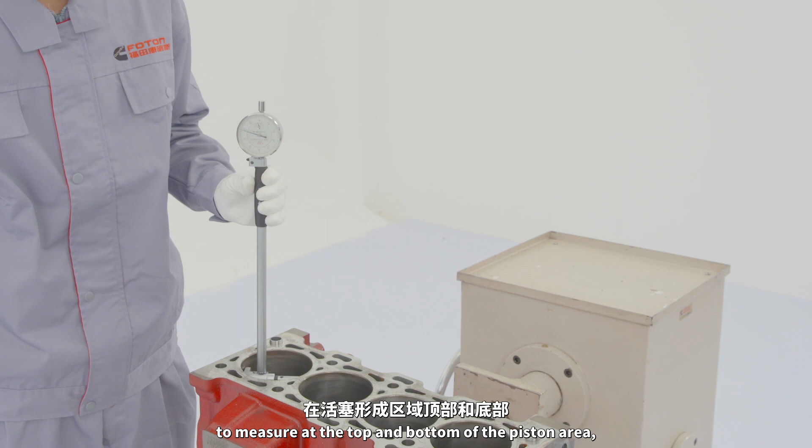Use internal dial indicator to measure the cylinder bore separately at the top and bottom of the piston area, totally 4 positions at 90 degrees. Cylinder bore diameter should be within 93.99 to 94.01 mm. The out of roundness should not exceed 0.01 mm. The taper should not exceed 0.01 mm. Remove the main bearing covers and put them aside orderly according to their marks.

Installation of piston cooling nozzle. Tools for installation of piston cooling nozzle: torque wrench. Clean and check piston cooling nozzle. Ensure that nozzle is not clogged, deformed or oil stained. Install nozzle. Ensure nozzle dowel pin is seated correctly and tighten bolts to 10 newton meters according to technical specification. Then, check if any oil cooling nozzle is forgotten to be installed.

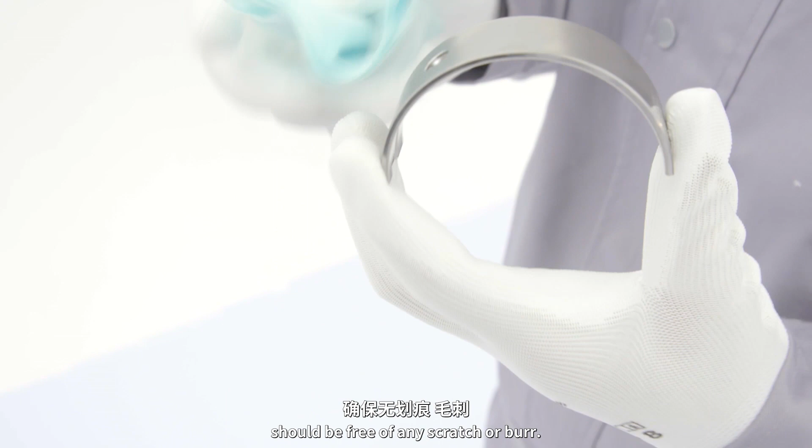Installation of crankshaft. Tools for installation of crankshaft: oil drip. Wipe the upper shell housing of spindle with non-woven fabrics. The shell surface and back should be free of any scratch or burr. The original positioning of the shell should be marked during removal to facilitate reinstallation. Both ends of the shell shaft and the shell base should be flush respectively.

The locating boss of upper shell should sit in the positioning groove of the shell base. The oil hole of upper shell should be aligned with that on shell housing. The shell surface should be coated with clean engine oil. Note that the fourth shaft seat and shell back shall not be oiled.

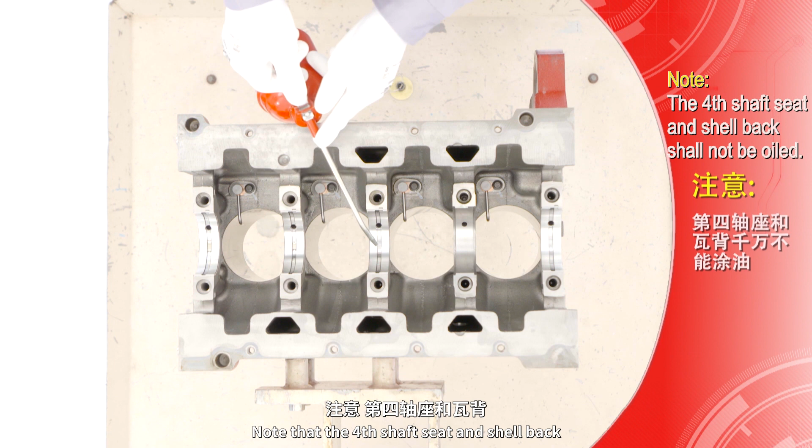Wipe the crankshaft mounting surface with non-woven fabrics. Check the crankshaft appearance for impact or scratch or for blister or rust. Clean all oil passages of crankshaft and dry them with compressed air. Crankshaft hoisting. Mount the crankshaft onto the cylinder block with its small head at the front of cylinder block. Handle gently to avoid impact. Each shaft journal of crankshaft should be coated with clean engine oil for lubrication.

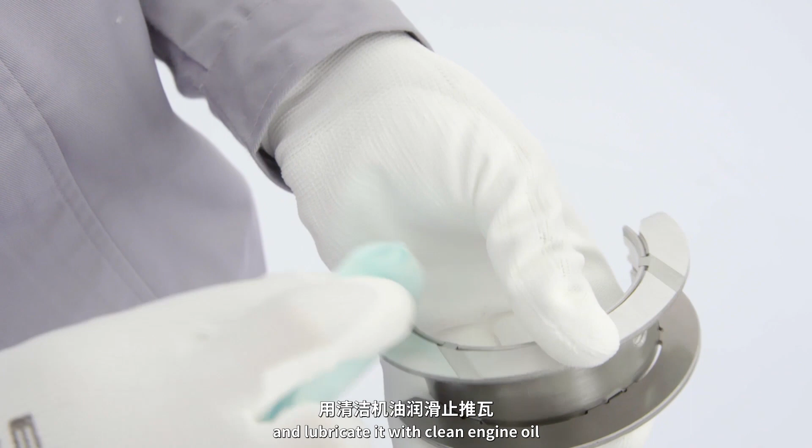Wipe the thrust bearing shell with non-woven fabrics and lubricate it with clean engine oil before installing it to the fourth bearing shell base. Rotate the crankshaft slightly until the clearance at one end of bearing shell cover is similar to that at the other end. Put in the thrust bearing shell.

With one hand facing the operator, rotate the crankshaft while, along the crankshaft rotating direction, push the shell into its base. Note that the upper locating boss of thrust bearing shell should sit in the positioning groove of the shell base. Check if both ends of all shells are flush respectively.

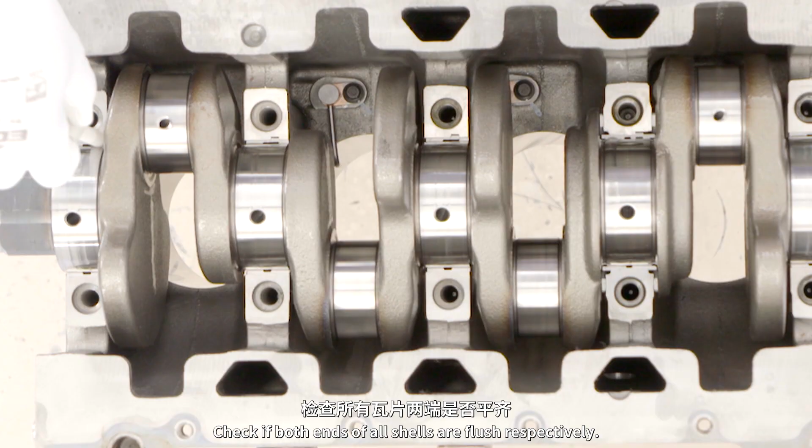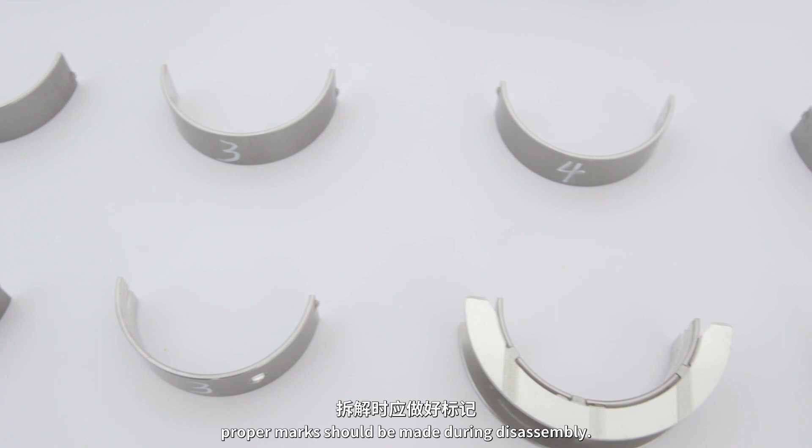Installation of main bearing. Tools for installation of main bearing: oil drip, torque wrench, dial indicator with magnetic base, bracket, shockproof rubber hammer, dial indicator. Wipe the lower shell and cover of main bearing with non-woven fabrics. Carefully check if there is any impact, scratch or impurity. If the used bearing shell is to be reinstalled, proper marks should be made during disassembly.

Installation of lower shell of main bearing. Ensure that the lower shell is seated correctly in the positioning groove and the bearing shell is flush with the shell base on both ends. The shell surface should be lubricated with clean engine oil before mounting onto main bearing cover. Ensure that the annular dowel pin on the main bearing cover is positioned correctly.

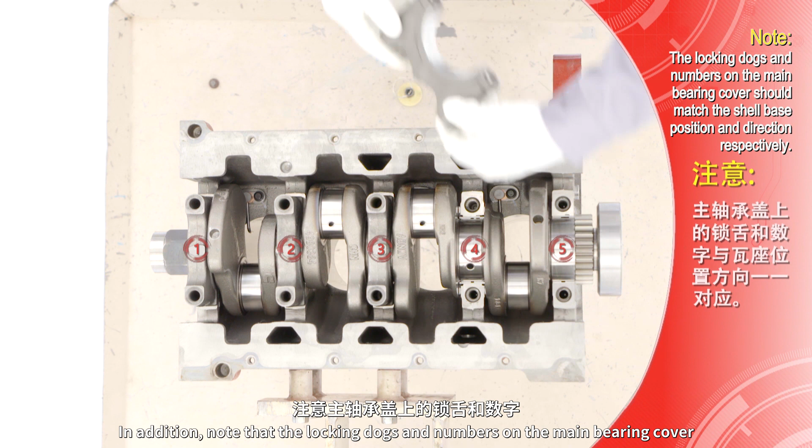In addition, note that the locking dogs and numbers on the main bearing cover should match the shell base position and direction respectively. Use a rubber hammer to gently tap the bearing cover until it fits closely with the bearing seat. Lubricate the main bearing cover bolts with clean engine oil, install them into the threaded sections, and tighten them crosswise from the center to both sides.

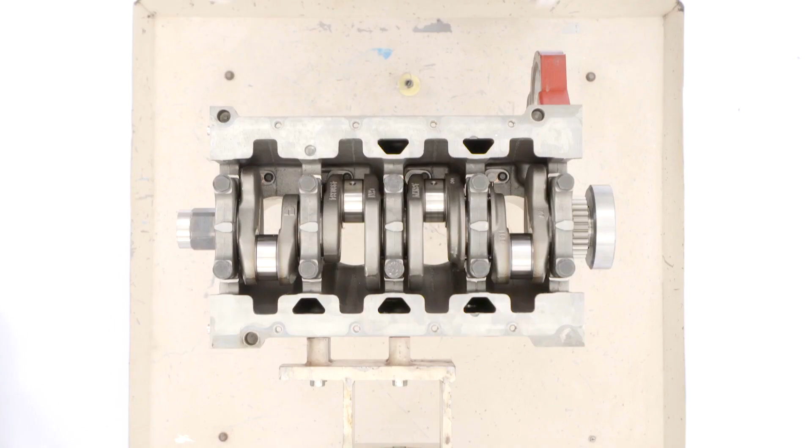Technical specifications. First, tighten the bolts to 50 newton meters, next torque to 80 newton meters, and finally rotate them by 90 degrees. Note that while tightening the main bearing bolts to final torque, check frequently if the crankshaft rotates freely.

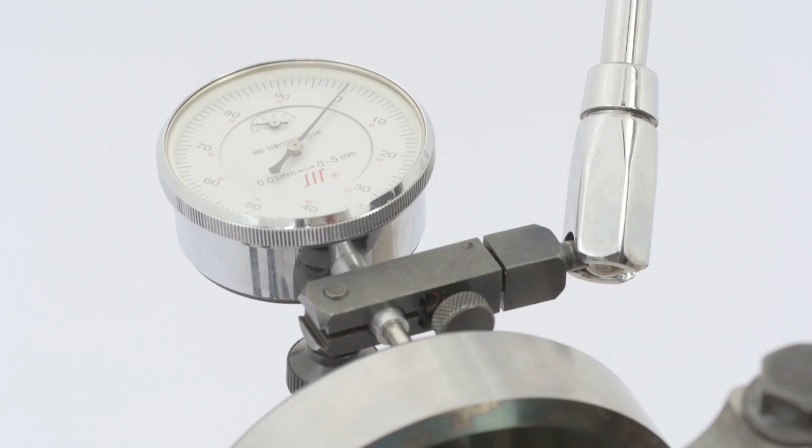Fix the magnetic base onto the flat surface of cylinder block, then press the dial indicator against the front end of the crankshaft and fix it at the smooth surface. Finally, move the crankshaft longitudinally and smoothly. The maximum difference among dial indicator readings is the axial clearance. The axial clearance should be within 0.023 to 0.365 mm.

Installation of front gear chamber. Tools used for installation of front gear chamber: torque wrench. Clean and check front end face of the cylinder block. Mount the new gasket onto front gear chamber.

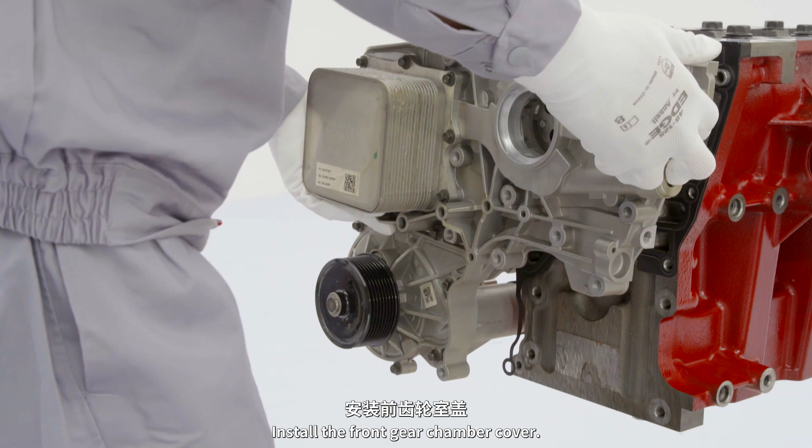Check the components of front gear chamber for scratches, cracks, and abrasion. Install the front gear chamber cover. Install bolts and tighten them as shown to 24 newton meters according to technical specification.

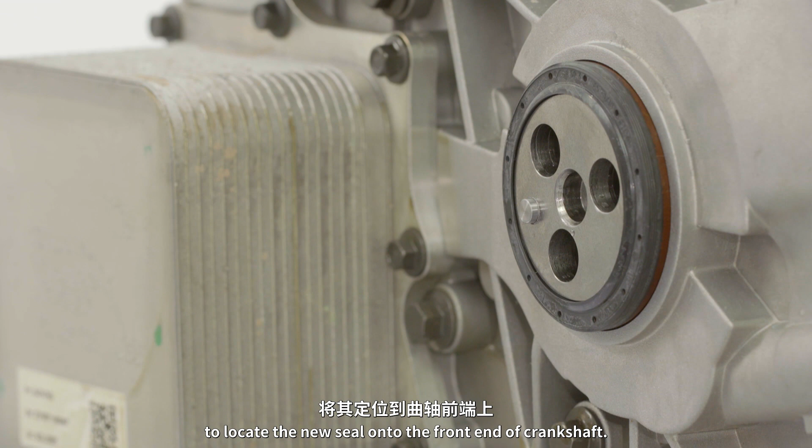Installation of crankshaft front seal. Tools for installation of crankshaft front seal: special tools for crankshaft front seal, rubber hammer. Clean and check oil seal hole. Use the duct of new oil seal to locate the new seal onto the front end of crankshaft.

Then use special tools to press the oil seal into the front chamber cover at a constant speed until the correct depth is reached. Note: it is prohibited to apply oil to the oil seal.

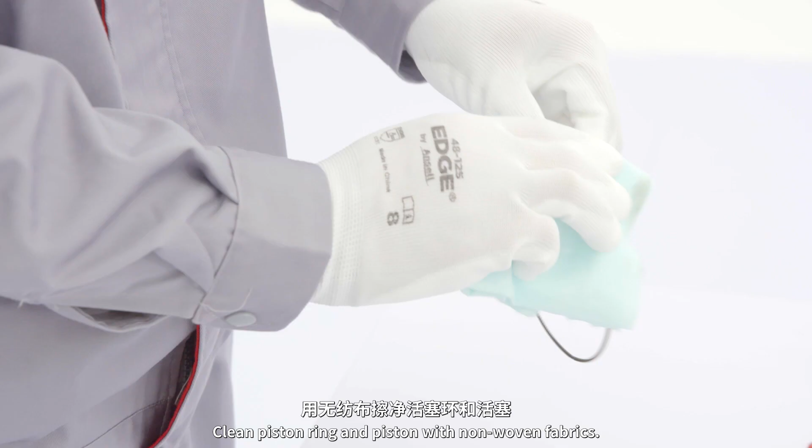Subassembly of piston and connecting rod. Tools for subassembly of piston and connecting rod: oil drip, piston expander. Clean piston ring and piston with non-woven fabrics. Check if they are clean without any burr.

Firstly, install two-piece oil control ring with expansion ring opening at 180 degrees from the oil control ring opening. Secondly, install the black gas ring. Finally, install silver-white gas ring. Note that while installing the top two gas rings, the top mark should face the piston top.

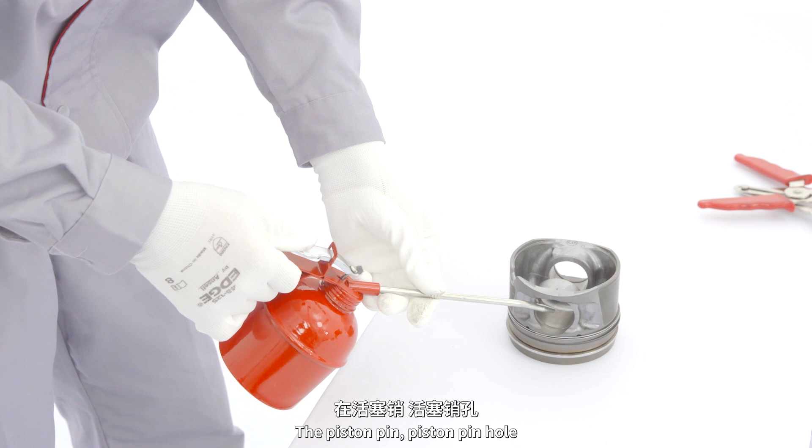The piston pin hole and connecting rod pin hole should be coated with a layer of clean oil. If the used piston pin as well as connecting rod and its bearing shell are to be reinstalled, proper marks should be made during disassembly. The removed parts must be restored.

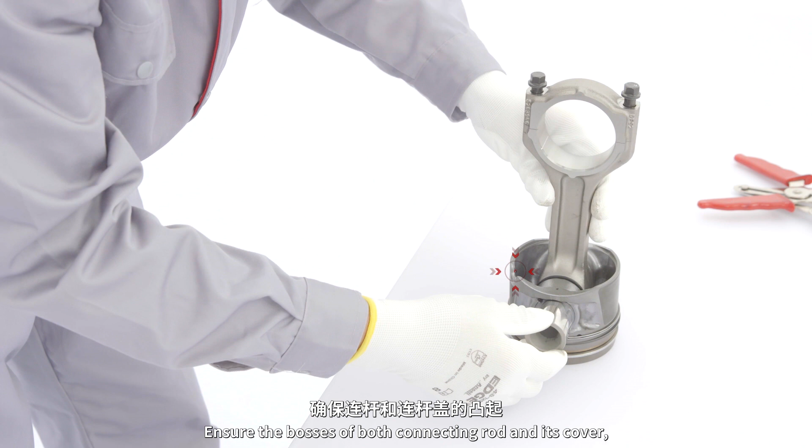Assembly of piston and connecting rod. Note: ensure the bosses of both connecting rod and its cover are at the same side as the notch of piston skirt. Install the new piston pin circlip. Check if the piston pin rotates smoothly.

Wipe the upper and lower shells of connecting rod with non-woven fabrics. The deep red shell should be at the top of connecting rod. The silver shell should be at the bottom of connecting rod. Check if there is any impact, scratch or burr.

Install the connecting rod bearing shell. Ensure the shell sits correctly in the positioning groove, and the bearing shell is flush with the shell base at both ends. Lubricate the connecting rod bearing shell surface with clean oil. Note that the shell back should not be oiled.

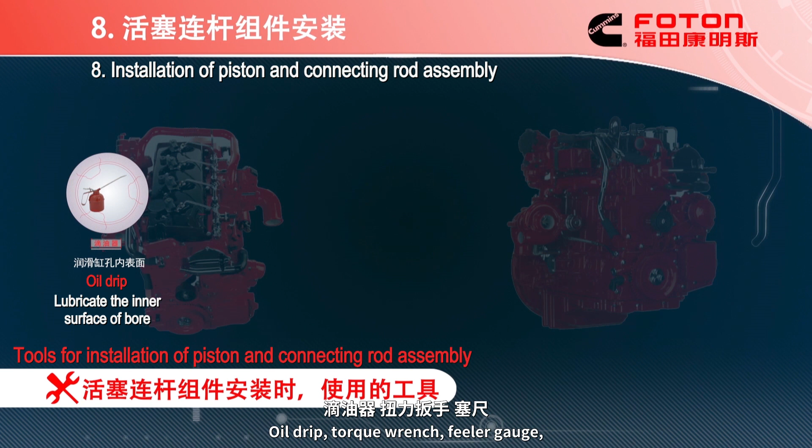Installation of piston and connecting rod assembly. Tools for installation of piston and connecting rod assembly: oil drip, torque wrench, feeler gauge, dial indicator, shockproof rubber hammer, piston ring compressor.

Lubricate the inner surface of bore with clean oil. Mount the guide tooling. The arrow mark on the top of piston should face the front of engine. Note: don't impact the piston cooling nozzle.

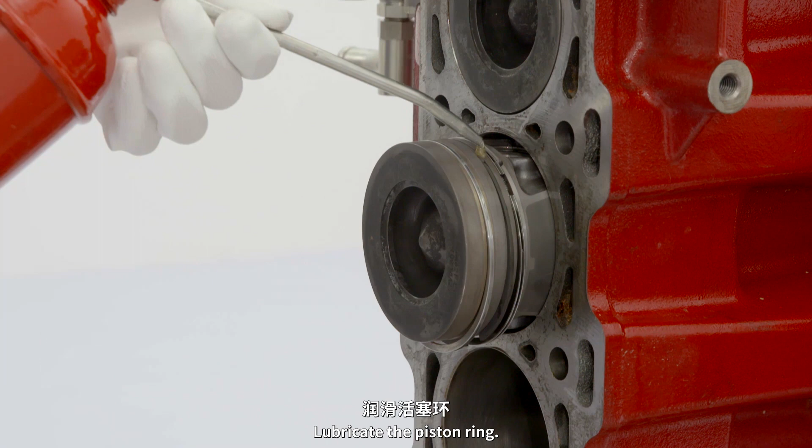Lubricate the piston ring. Adjust the piston ring opening direction so that the openings of adjacent piston rings are placed by 120 degrees and not at the piston pin axis. Compress piston ring with piston ring compressor. Install piston and connecting rod assembly.

If the piston cannot move freely during installation, remove the piston. Check if it is broken or damaged, and lubricate the connecting rod shell surface and bolts with clean oil. After that, install the connecting rod cover to the original connecting rod according to the mark.

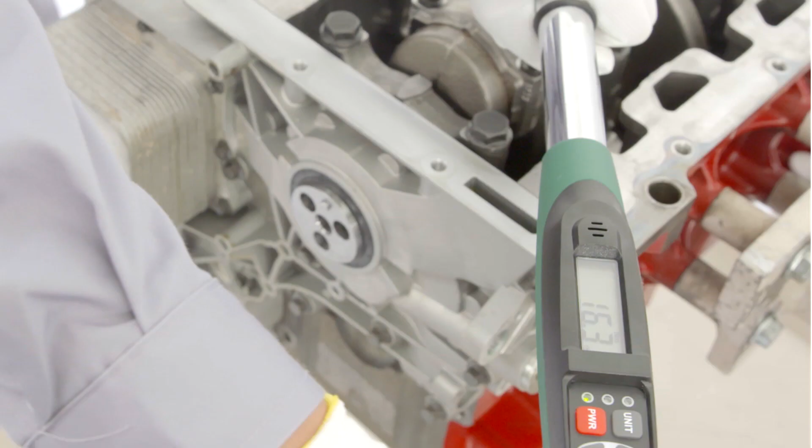Tighten bolts. Technical specifications: firstly, tighten the bolts to 34 newton meters. Secondly, rotate the bolts by 60 degrees. Check if all the bosses of connecting rod cover face the front of the engine, if the crankshaft rotates freely, and if the connecting rod clearance is within 0.10 mm to 0.35 mm.

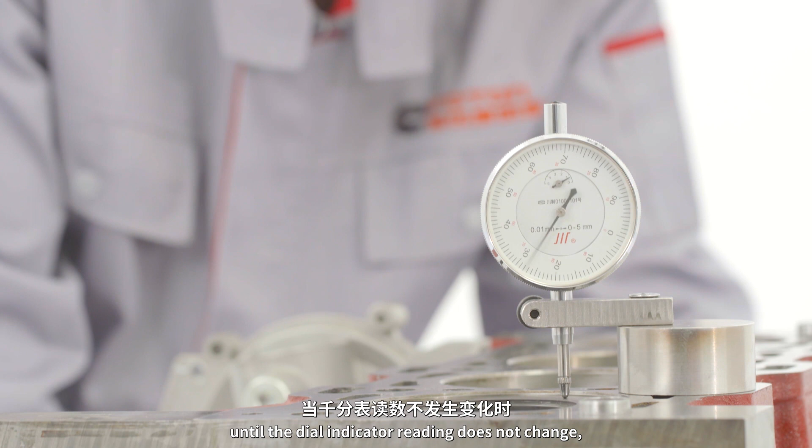Rotate the crankshaft until the dial indicator reading does not change, which means the TDC of piston is reached. On smooth flat surface of cylinder block, set the dial indicator to 0 and measure the piston protrusion. It should be within 0.034 to 0.260 millimeters.

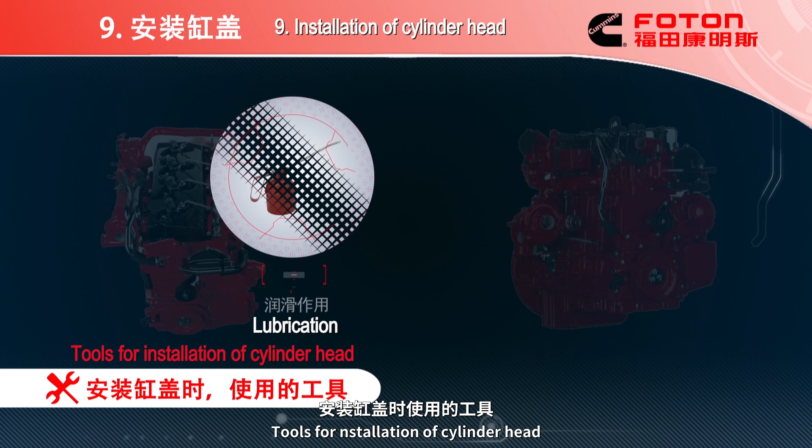Installation of cylinder head. Tools for installation of cylinder head: oil drip, torque wrench. New cylinder head gasket must be used. Check cylinder head gasket and ensure it is intact and clean. Install cylinder head gasket to the top of engine cylinder block. The dowel pin hole on the gasket should be aligned with annular dowel pin.

Installation of cylinder head. Lubricate bolts with clean oil and install them. Pre-tighten the bolts manually and tighten them as shown. Technical specifications: firstly, tighten the bolts to 60 newton meters. Secondly, clockwise rotate the bolts by 90 degrees. Thirdly, continue rotating clockwise by 90 degrees.

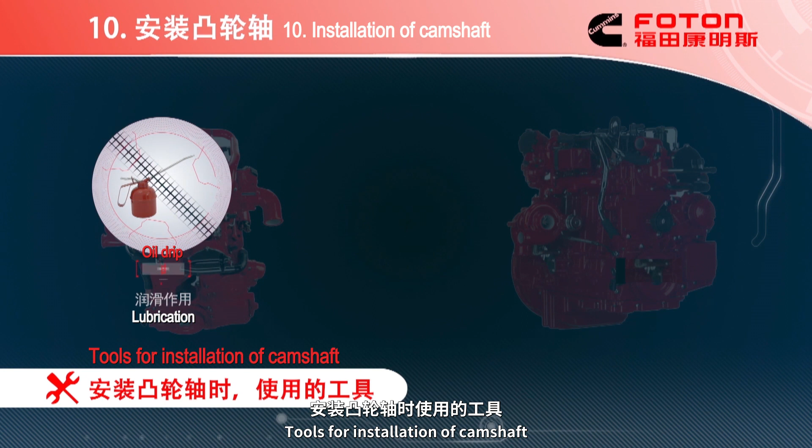Installation of camshaft. Tools for installation of camshaft: oil drip, torque wrench, dial indicator with magnetic base, bracket, dial indicator. Clean camshaft surface and check if it is oily or scratched. Install camshaft. Note that the camshaft should not be impacted. Do not mount the camshaft into its hole forcibly. Otherwise, the camshaft will be damaged.

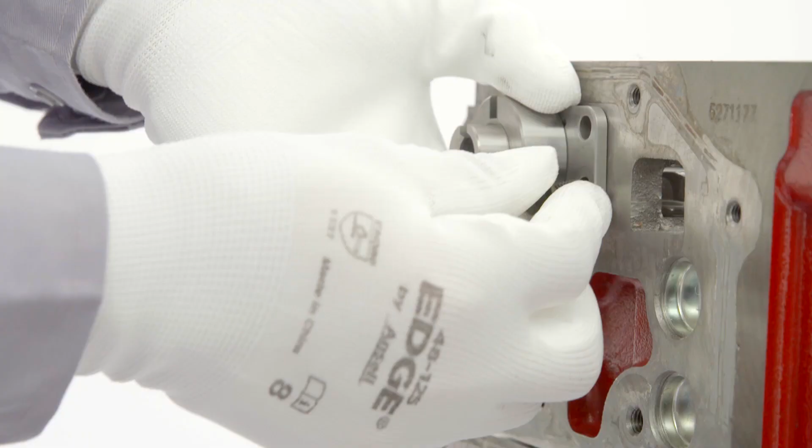Thoroughly lubricate camshaft journal and cam with clean oil. Check and mount camshaft thrust plate. Tighten bolts to 10 newton meters according to technical specification. Measure the axial clearance of camshaft. It should be within 0.10 to 0.40 millimeters.

Installation of driving chain idler. Tools used for installation of driving chain idler: oil drip, torque wrench. Install the groove thrust washer onto annular dowel pin. Align the groove with the dowel pin hole in the cylinder block. Check and install the idler.

Lubricate the idler shaft with clean oil and rotate it until the dowel pin is locked into the cylinder block pin hole. Install the bolts and thrust washer. Tighten bolts to 130 newton meters according to the technical specification. Note the mounting direction of driven sprocket and ensure that the small chamfer side faces outwards. Tighten the bolts to 10 newton meters according to the technical specification.

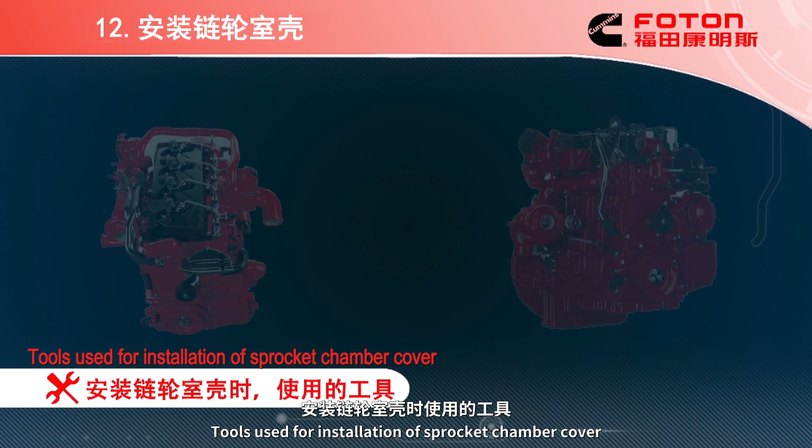Installation of sprocket chamber cover. Tools used for installation of sprocket chamber cover: sealant. Check if there is any part cracked or worn severely. Install a new sealing ring into the sealing groove. Ensure proper installation. Apply sealant to the sealing ring as shown. Install the sprocket chamber cover and pre-tighten it manually. Don't tighten the sprocket chamber bolts.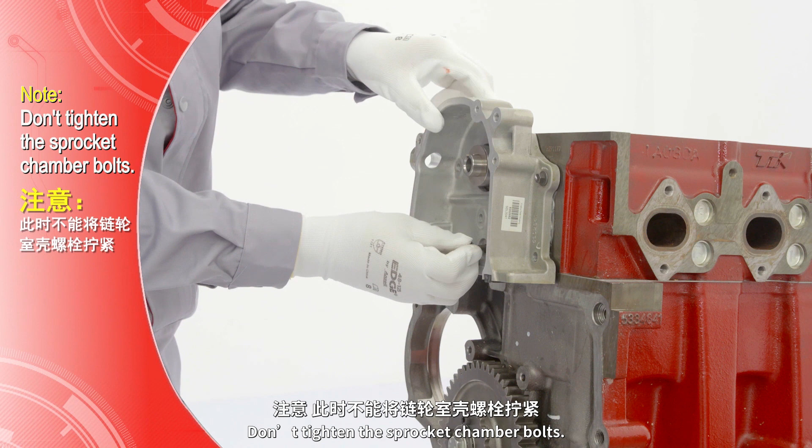Installation of driving chain. Tools used for the installation of driving chain: torque wrench. Install a new friction gasket onto the front end of camshaft. Install the overhead camshaft sprocket together with a driving chain onto the front end of camshaft and driven gear. Install the chain fixing guide and tensioner chain guide. Tighten the screws to 20 newton meters according to the technical specification. At this time, do not tighten the sprocket chamber housing and bolts shown in the figure.

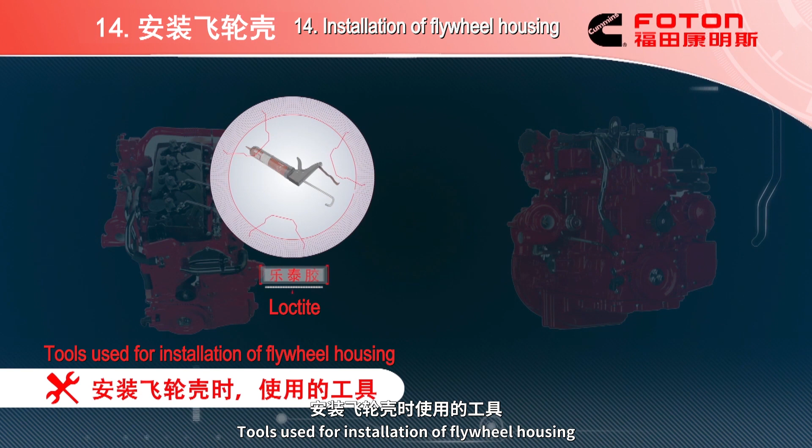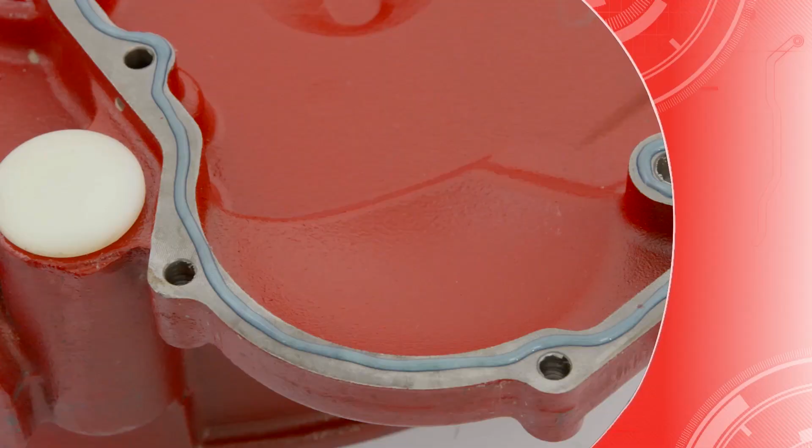Installation of flywheel housing. Tools used for installation of flywheel housing: Loctite, torque wrench. Clean the mounting surface of flywheel housing. Check the flywheel housing and ensure it is free of any crack. According to the tracks as shown, apply Loctite 509 evenly on the mounting surface with glue width at 1 to 2 millimeters. The glue line must be continuous without any breakpoint. Note: if the assembly is not finished in 5 minutes or if the tightening is not completed in 15 minutes after gluing, remove the Loctite and repeat the gluing again.

The well-glued flywheel housing should be mounted onto the rear end face of cylinder block along the guide pin. Pre-tighten bolts manually. Note, during installation, the flywheel housing should not rub against or shake on the cylinder end face so as to protect the coated surface. Tighten bolts in sequence. Technical specifications: 85 newton meters for number 1 to number 7 bolts, and 24 newton meters for number 8 to number 10 bolts.

After the flywheel housing is installed, refer to the torque and sequence shown in the figure to tighten the sprocket housing bolts in several steps. Step 1: 3 newton meters for number 1 and number 2 bolts. Step 2: 6 newton meters for number 3 and number 4 bolts. Step 3: 3 newton meters for number 5, number 6, number 7 and number 8 bolts. Step 4: 10 newton meters for number 1 and number 2 bolts. Step 5: 12 newton meters for number 3 and number 4 bolts. Step 6: 10 newton meters for number 5, number 6, number 7 and number 8 bolts. Step 7: 20 newton meters for number 9 bolt.

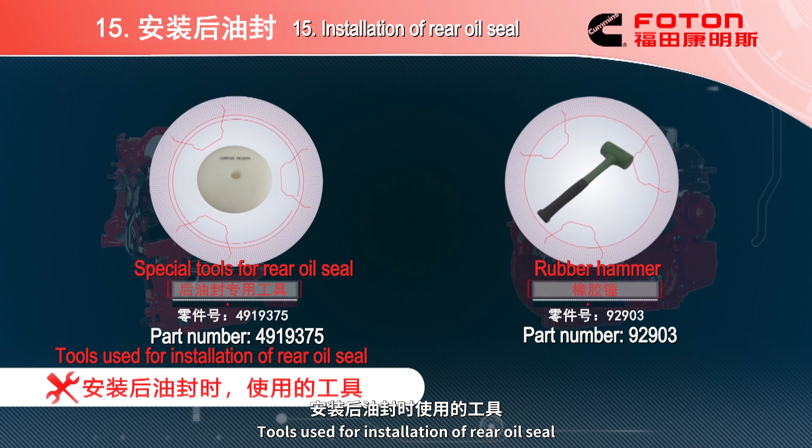Installation of rear oil seal. Tools used for installation of rear oil seal: special tools for rear oil seal, rubber hammer. Clean and check oil seal and its mounting hole. Use the guide of the new oil seal and locate the new seal onto the rear end of crankshaft. Then use special tools and press the seal to the correct depth at a constant speed. Note: don't oil the new oil seal.

Installation of flywheel. Tools used for installation of flywheel: torque wrench, crank.

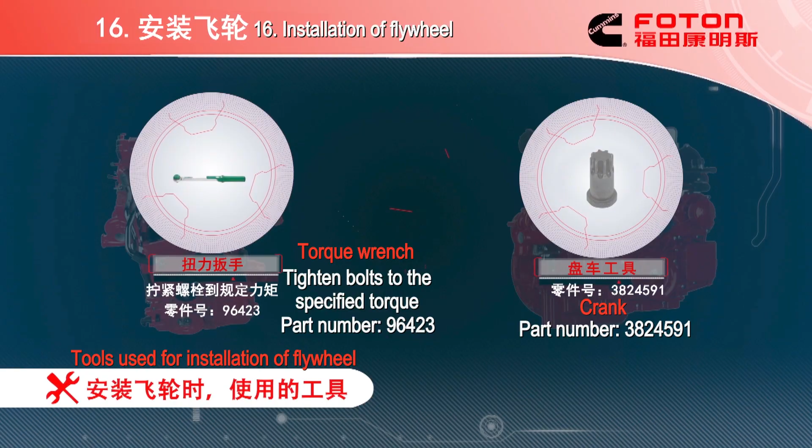Clean and check the flywheel and ensure it is free of any crack. Installation of flywheel: manually pre-tighten the oiled bolts. Fix the flywheel with the crank to prevent it from rotating. Tighten bolts in the heart-shaped way. Technical specifications: firstly, tighten the bolts to 30 newton meters. Secondly, rotate the bolts by 90 degrees.

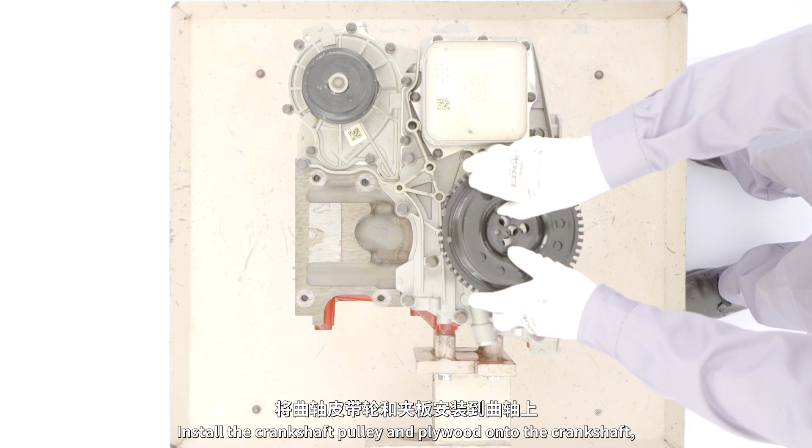Installation of crankshaft pulley. Tools used for the installation of crankshaft pulley: torque wrench, crank. Check the crankshaft pulley for tooth lost, crack or other defects. Install the crankshaft pulley and plywood onto the crankshaft. Ensure to align the dowel pin correctly. Lubricate the bolts with clean oil and pre-tighten them manually.

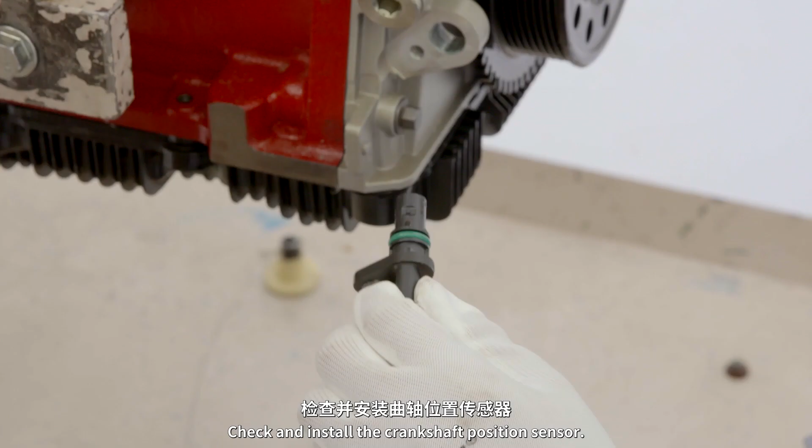Tighten the bolts. Technical specifications: firstly, tighten the bolts to 75 newton meters. Secondly, rotate the bolts by 45 degrees. Note: the crankshaft must be fixed with the crank. Check and install the crankshaft position sensor. Technical specification: 8 newton meters.

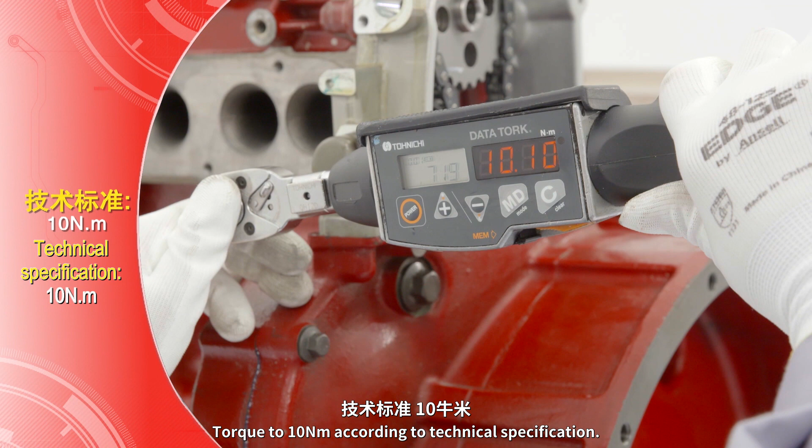Installation of chain tensioner. Tools used for installation of chain tensioner: torque wrench. Check if there is any part cracked or worn excessively. Install chain tensioner. Tighten bolts step by step in pairs. Torque to 10 newton meters according to technical specification.

Confirmation of engine timing. Tools used for determining engine timing: torque wrench, crank, timing pin, camshaft timing plate. Use the engine crank to rotate the crankshaft clockwise. Push the timing pin into the crankshaft pulley and the designated hole in the front chamber cover. Lock up the crankshaft. Mount the timing cover to the front end of camshaft. Tighten the timing cover bolts manually. Meanwhile, keep the rear notch of camshaft vertically upward.

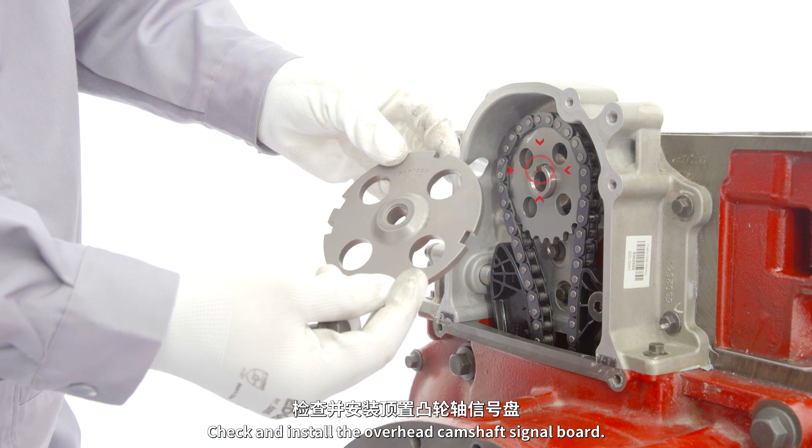Confirm the engine timing. Check and install the overhead camshaft signal board. Install the bolts. Technical specifications: firstly, tighten bolts to 120 newton meters. Secondly, release bolts by 180 degrees. Thirdly, tighten to 30 newton meters. Fourthly, rotate by 45 degrees.

Installation of sprocket chamber cover. Tools for installation of sprocket chamber cover: Loctite, torque wrench. Both sides of sprocket chamber housing protruding from the rubber pad should be glued. Check and install sprocket chamber cover. Pre-tighten it manually. Tighten the bolts as shown to 7 newton meters according to technical specification. Check and install camshaft position sensor. Torque to 8 newton meters according to technical specification.

Installation of rocker. Tools for installation of rocker: oil drip, torque wrench. Check jumper clamp and rocker for any crack or excessive wear. Restore the removed parts according to the marks made during disassembly. Any cracked or worn part should be immediately replaced. If the jumper clamp is replaced with a new one, note that the large head should face the exhaust side.

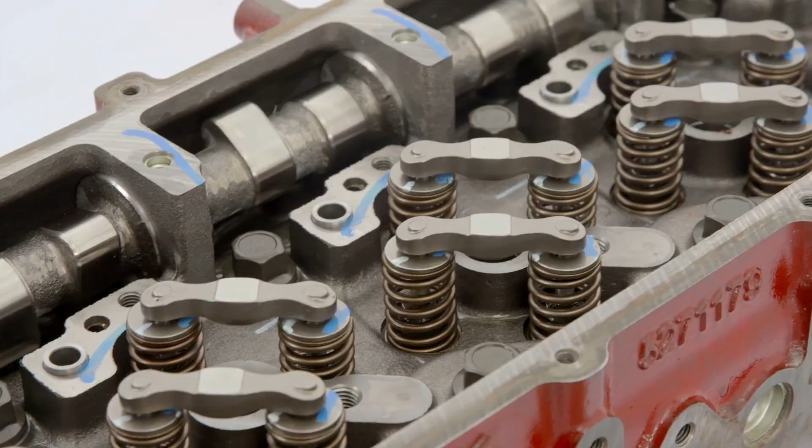Use clean oil to lubricate the rocker and the contact surface between camshaft and jumper clamp. Restore the rocker assembly. Pre-tighten it manually. Tighten bearing seat bolts to 36 newton meters according to technical specification.

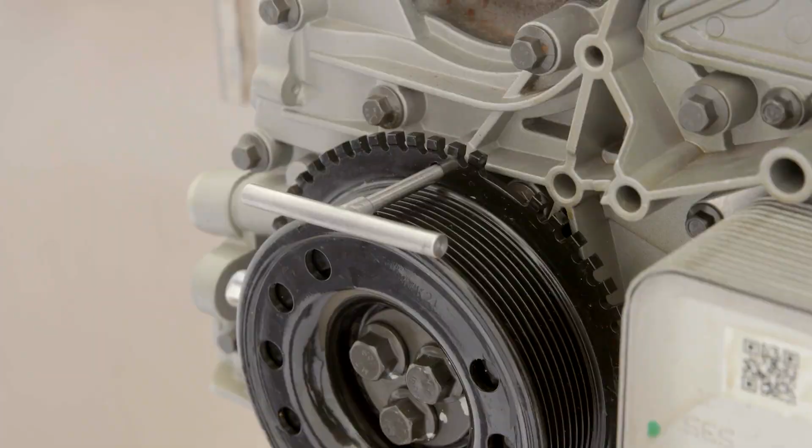Adjustment of valve clearance. Tools for adjustment of valve clearance: feeler gauge 0.02 to 1.00 millimeters, torque wrench, timing pin, hexagon socket wrench, crank. After confirming the engine timing, rotate crankshaft with a crank. Insert the timing pin. When the crankshaft pulley hole aligns with front gear chamber cover hole and both rockers of number 1 cylinder are loosened, it indicates the TDC of number 1 cylinder compression is reached.

Note: only when the engine coolant temperature stays at 60 degrees Celsius or below can the valve clearance be adjusted. Intake valve clearance 0.25 plus or minus 0.05 millimeters. Exhaust valve clearance 0.51 plus or minus 0.05 millimeters. At the TDC of number 1 cylinder compression, check or adjust the intake valve clearance of number 1 cylinder, exhaust valve clearance of number 1 cylinder, intake valve clearance of number 2 cylinder, exhaust valve clearance of number 3 cylinder.

Turn the crankshaft by 360 degrees with a crank. Adjust the engine to number 4 cylinder compression TDC. Check or adjust the exhaust valve clearance of number 2 cylinder, intake valve clearance of number 3 cylinder, intake valve clearance and exhaust valve clearance of number 4 cylinder.

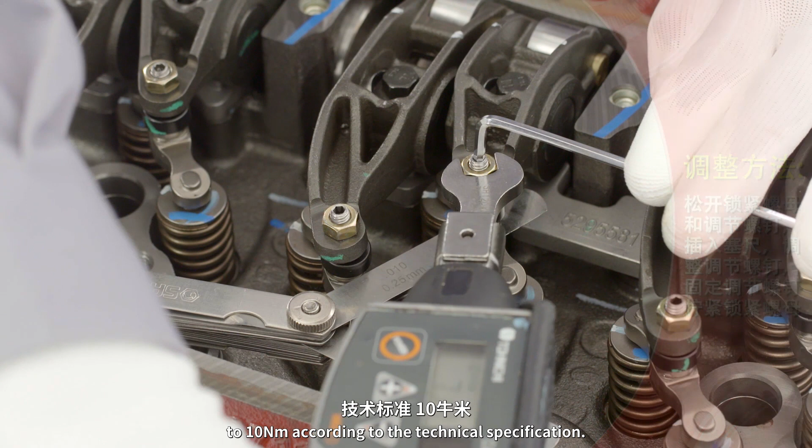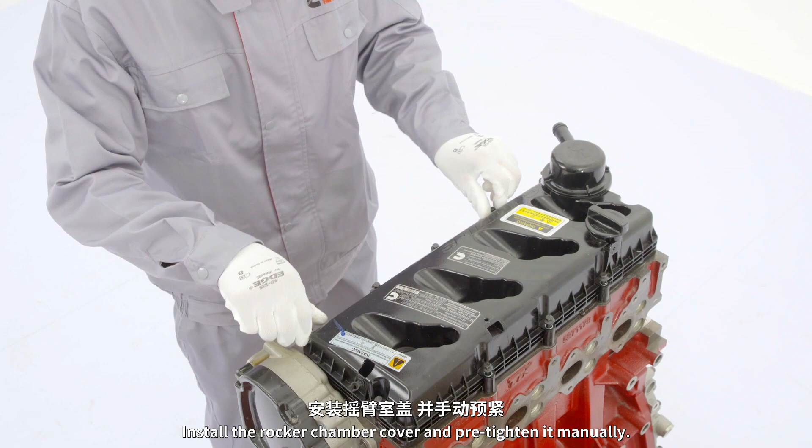Installation of rocker chamber cover. Tools for installation of rocker chamber cover: torque wrench. Clean and check the rocker chamber cover. Check if the sealing strip is clean and intact. Replace any cracked sealing strip. Install the rocker chamber cover and pre-tighten it manually. Tighten bolts in sequence. Torque to 10 newton meters according to technical

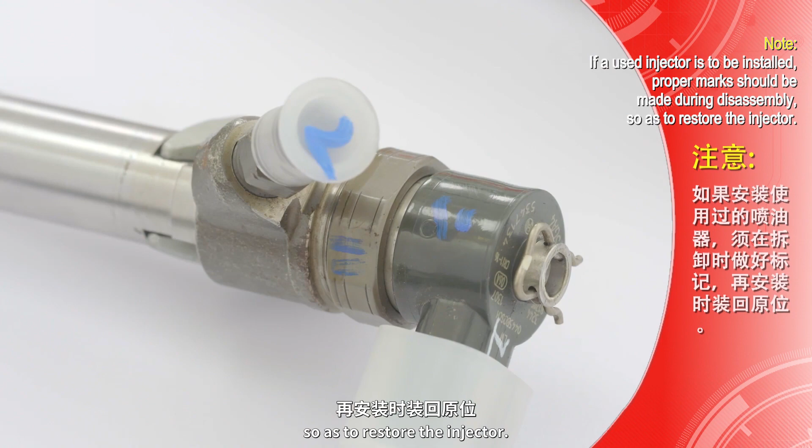specification. Installation of fuel injector. Tools for installation of fuel injector: torque wrench. If a used injector is to be installed, proper marks should be made during disassembly so as to restore the injector. Check if there is any damaged part of fuel injector.

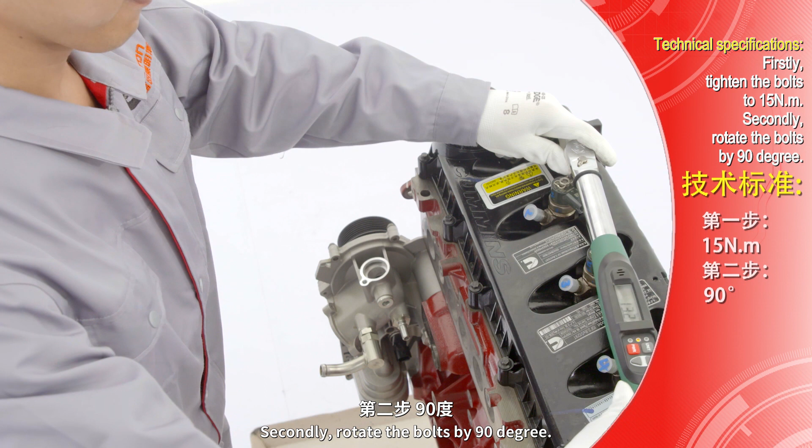Note that the copper gasket of injector cannot be omitted. It is a must to use a new copper gasket. The inlet cap of injector is not allowed to be removed. Remove the injector nozzle cap. Install injector into the cylinder head with the injector inlet facing the intake side. Tighten injector holder bolts. Technical specifications: firstly, tighten the bolts to 15 newton meters. Secondly, rotate the bolts by 90 degrees.

Installation of injector supply pipe. Tools for installation of injector supply pipe: torque wrench. If a used fuel supply pipe is to be installed, proper marks should be made during disassembly so as to restore the pipe. Check and install the high-pressure common rail.

Tighten it manually. Remove the caps at both ends of the fuel supply pipe as well as the injector outlet joint cap. Install the injector supply pipe and pre-tighten it manually. For the rest 3 pipelines, repeat this process. Tighten the fuel supply pipe nuts at the injector to 27 newton meters according to the technical specification. Tighten the fuel supply pipe nuts at the rail to 27 newton meters according to the technical specification.

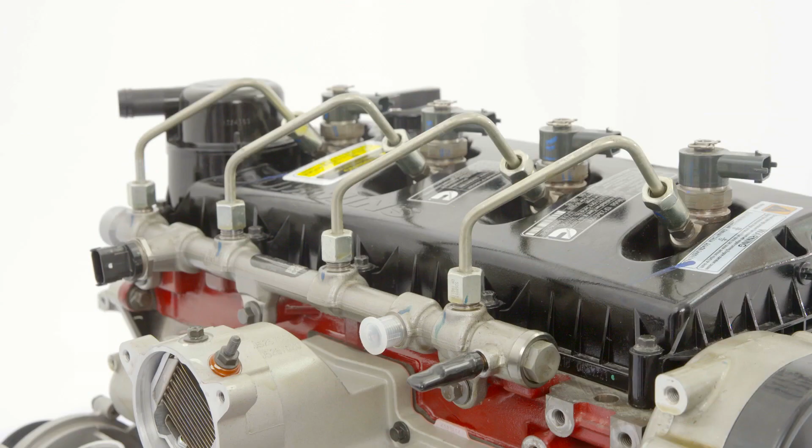Note: the joints should be tightened to the specified torque with a torque wrench. The joints, if loosened, may lead to fuel leakage. The joints, if over-tightened, may damage the fuel pipe. Tighten the high-pressure fuel rail bolts to 24 newton meters according to the technical specifications.

Installation of intake manifold. Tools for installation of intake manifold: torque wrench. Install a new intake manifold gasket onto the intake manifold. Note that the side with the part number should face outwards. Install the intake manifold. Tighten the bolts in sequence to 10 newton meters according to the technical specification. Check and mount the intake heater. Note the mounting direction. Torque to 5 newton meters according to the technical specification.

Check and install the intake manifold pressure and temperature sensor. Torque to 6 newton meters according to the technical specification. Install the intake elbow and seal onto the intake manifold. Torque to 10 newton meters according to technical specification.

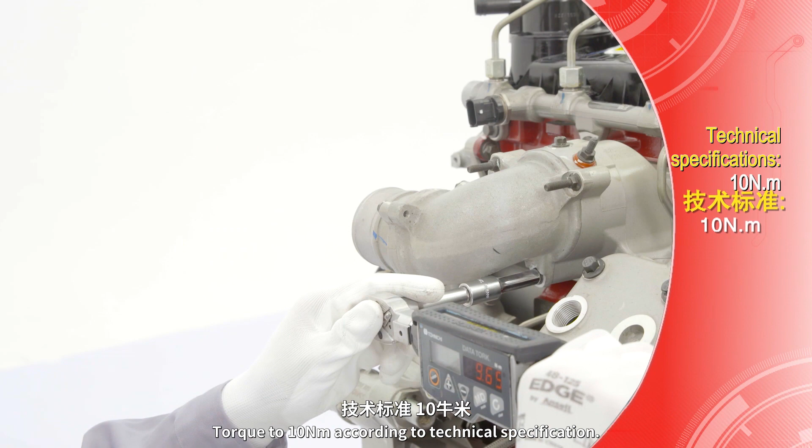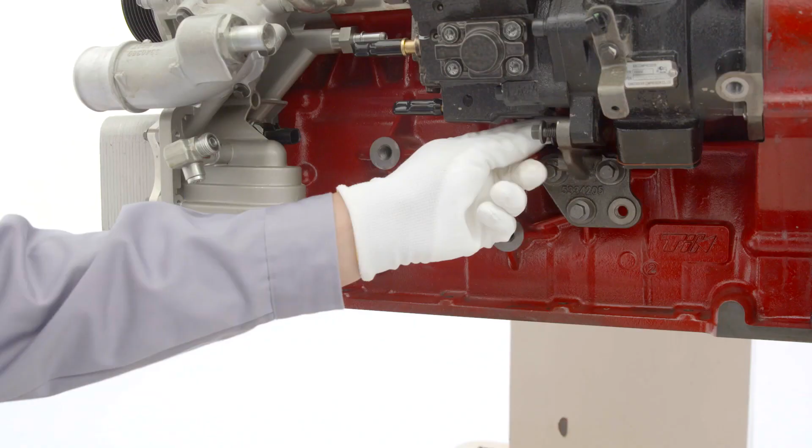Installation of air compressor. Tools for installation of air compressor: torque wrench. Check air compressor housing and drive gear for crack or other defects. Mount air compressor and 3 bolts onto the cylinder block. Tighten bolts to 33 newton meters according to technical specification. Mount the air compressor bracket and tighten its 5 bolts manually. Tighten bolts in sequence to 24 newton meters according to technical specification.

Mount the trapezoidal joint onto the oil filter seat and pre-tighten it manually. Find the right angle according to the mark and tighten the joint onto the oil pump to 22 newton meters according to the technical specification. Mount the air compressor oil supply pipe onto the air compressor and oil pump connector. Screw 2 hollow pipe fittings, 1 and 2, onto the air compressor. Torque to 24 newton meters according to technical specification.

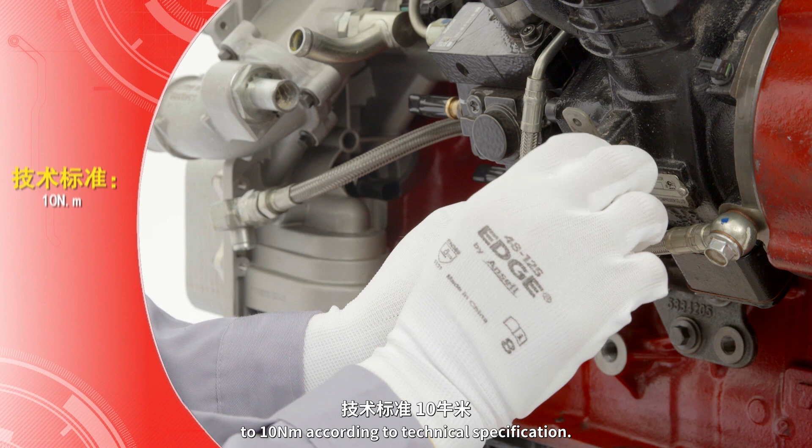Screw the pipe fitting onto the trapezoidal joint 3 and torque it to 18 newton meters according to technical specification. Mount and tighten the trapezoidal screw to 10 newton meters according to technical specification. Install coolant pipe.

Installation of fuel pump. Tools for installation of fuel pump: torque wrench. Check and mount fuel pump assembly. The convex side of fuel pump should be completely fitted into the concave of compressor. Mount and tighten the bolts to 24 newton meters according to technical specification. Note: it is unnecessary to calibrate the timing of high-pressure fuel pump and crankshaft.

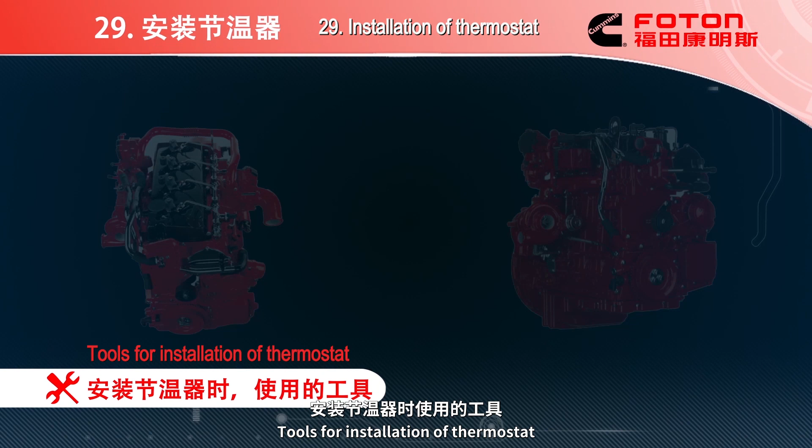Installation of thermostat. Tools for installation of thermostat: torque wrench. Check thermostat for any notch or other defects. Mount it onto cylinder head and tighten its bolts to 23 newton meters according to technical specification. Note: without thermostat, it is prohibited to run the engine. Otherwise, the engine will be overheated. Check and install coolant bypass pipe. O-ring must be replaced. Install and tighten fixing bolts to 7 newton meters according to technical specification.

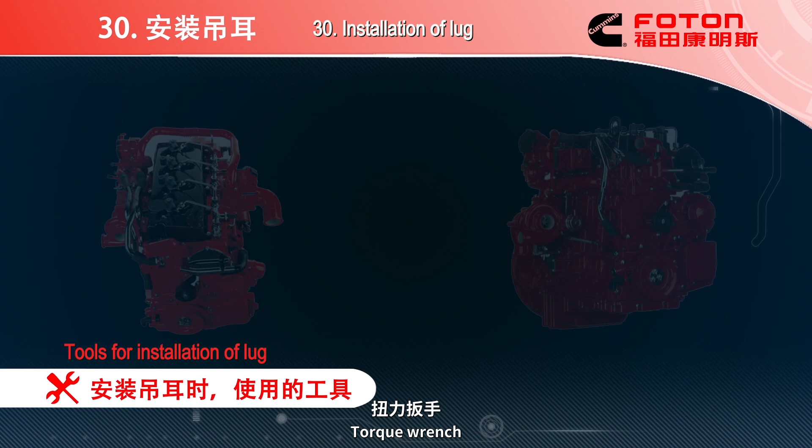Installation of lug. Tools for installation of lug: torque wrench. Mount front and rear lugs of engine. Torque to 33 newton meters according to technical specification.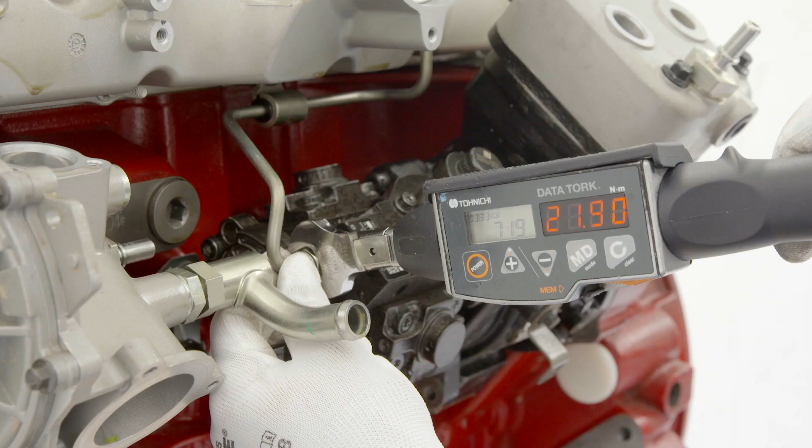Installation of fuel rail supply pipe. Tools for installation of fuel rail supply pipe: torque wrench. Mount new gasket onto intake manifold. Clean and check high pressure supply pipe. Remove protective cap. Mount fuel supply pipe onto fuel pump and fuel rail. Pre-tighten manually. Tighten bolts at the fuel pump and rail to 22 newton meters according to technical specification. Tighten fixing screws at the intake manifold to 10 newton meters according to technical specification.

Installation of coolant inlet pipe joint. Tools for installation of coolant inlet pipe joint: torque wrench. Install a new O-ring into the coolant inlet pipe joint. Mount the inlet joint and bolts. Tighten bolts to 10 Nm according to technical specification.

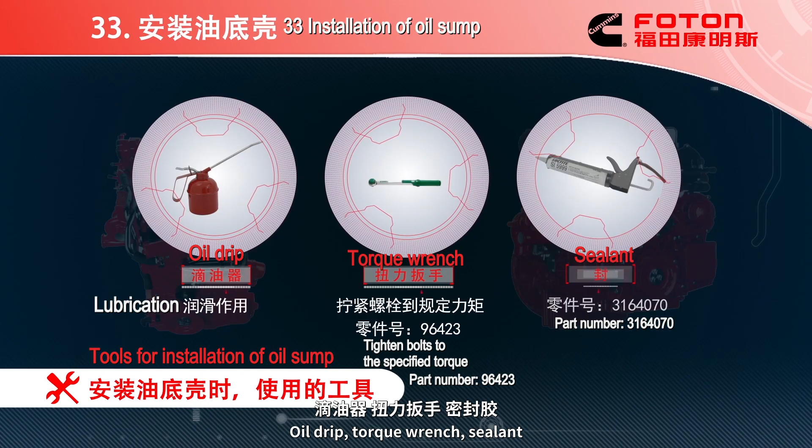Installation of oil sump. Tools for installation of oil sump: oil drip, torque wrench, sealant. Clean and check oil sump mounting interface. The T-joint shown in the figure should be coated with a thin layer of sealant. Note: if the assembly is not finished in 5 minutes, or if the tightening is not completed in 15 minutes after gluing, remove the sealant and repeat the gluing again.

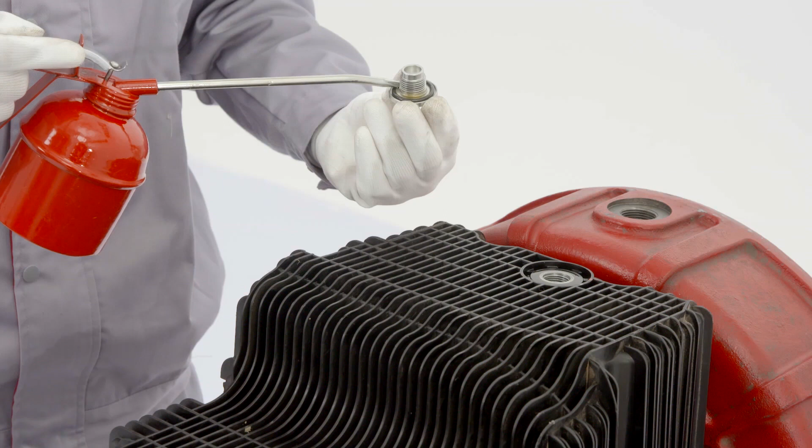Check and mount the oil sump. Note its mounting direction. Tighten screws as shown to 24 Nm according to technical specification. Lubricate and check threads and sealing surface of drain plug. The O-ring, if damaged, should be replaced. Tighten oil drain plug to 24 Nm according to technical specification. Avoid over-tightening. Install oil dipstick.

Installation of oil filter. Tools for installation of oil filter: oil drip, torque wrench. Lubricate main gasket 1 and O-ring 2 with clean oil. Ensure auxiliary gasket 3 is clean and dry. Don't lubricate. Pre-fill clean oil into the filter. Mount the filter onto its base and tighten it manually until the auxiliary gasket contacts the filter surface. Tighten the filter bottom with a 1/2 inch wrench to 40 Nm according to technical specification.

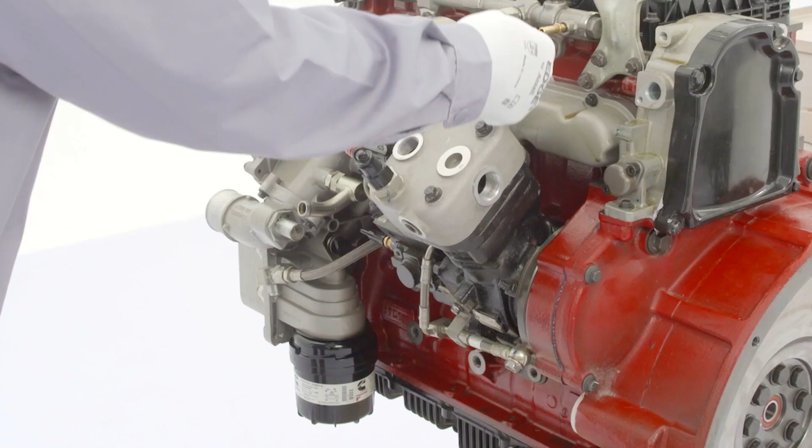Installation of fuel return pipe. Remove fuel rail and pump protective cap. Mount fuel return pipe joint onto high pressure fuel rail. Mount fuel return pipe joint onto high pressure fuel pump. Mount fuel return pipe joint onto injector respectively. According to the pipeline layout method recorded during this assembly, fix the fuel return pipe properly and ensure it is not twisted or bent.

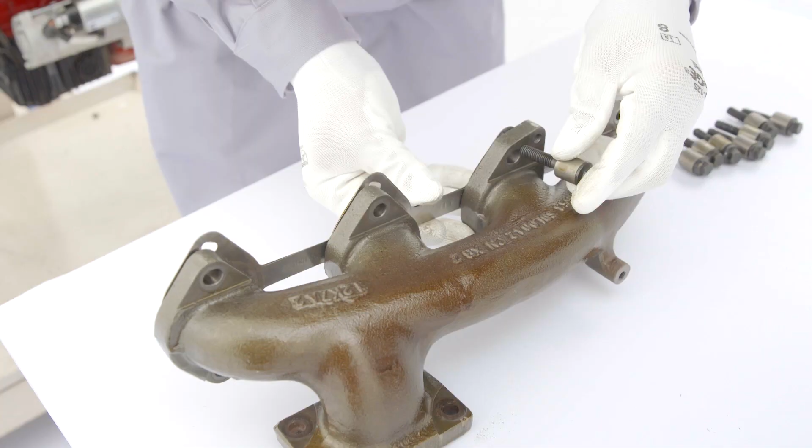Installation of exhaust manifold. Tools used for installation of exhaust manifold: torque wrench. Mount the new gasket onto the exhaust manifold. No positive and negative sides are distinguished for this gasket, namely, it is available on both sides. Mount exhaust manifold onto cylinder head. Tighten the manifold from its center to the outside to 40 Nm according to technical specification. Note: to retighten all bolts, install heat shield and tighten bolts to 10 Nm according to technical specification.

Installation of turbocharger. Tools used for installation of turbocharger: torque wrench. The O-ring of oil return pipe should be coated with a thin layer of oil. Push oil return pipe into its boss. Ensure the two O-rings completely sit in the hole. Install new gasket and turbocharger. Install and tighten 3 mounting nuts and 1 screw to 24 Nm according to technical specification.

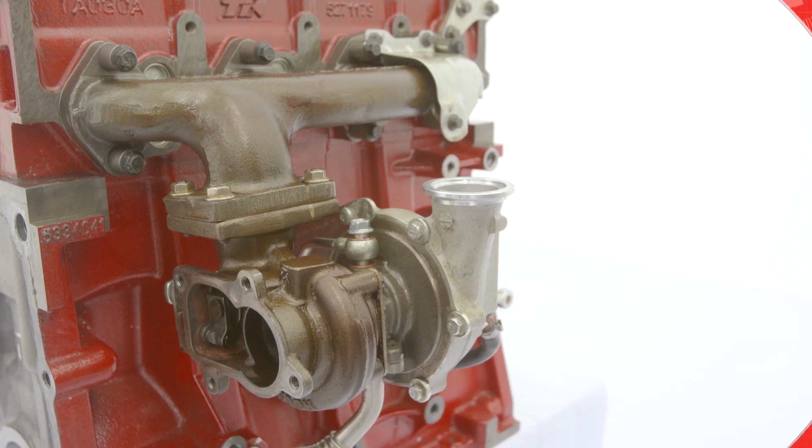Install oil supply pipe onto front gear cover 1 and turbocharger bearing seat 2. New copper gasket must be used. The oil supply pipe joint of turbocharger should be filled with clean oil for pre-injection. Tighten oil supply pipe to final torque: 24 Nm according to technical specification. Tighten fixing screws to 24 Nm according to technical specification. Install turbocharger and its outlet joint. Torque to 24 Nm according to technical specification. Install turbocharger compressor, outlet joint and new O-ring.

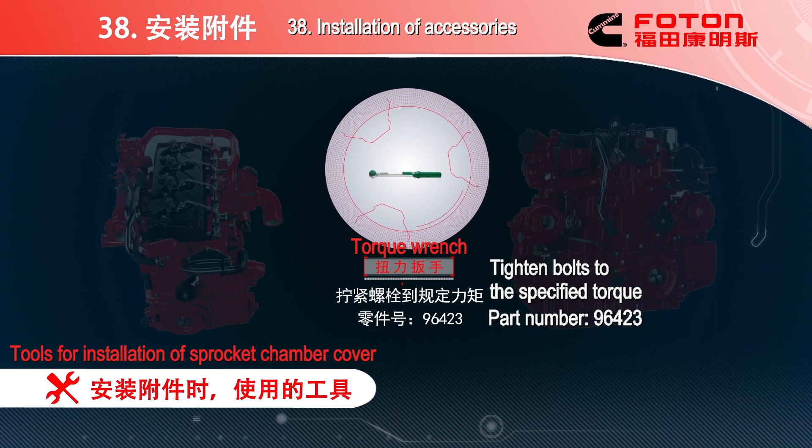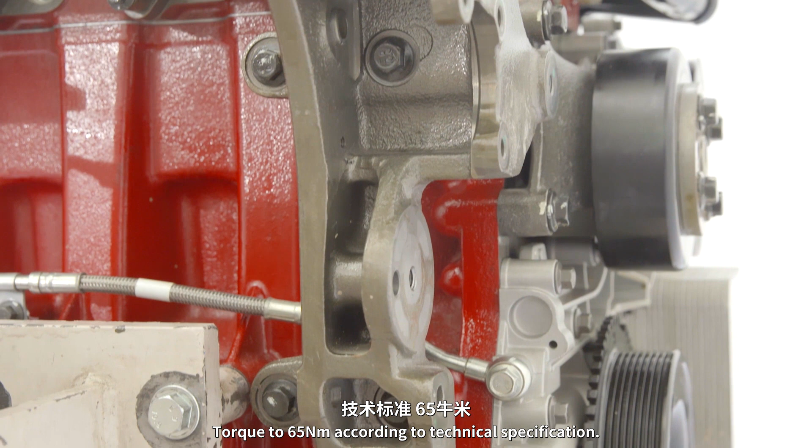Installation of accessories. Tools used for installation of accessories: torque wrench. Check and install the starter. Torque to 43 Nm according to technical specification. Check and install the fan hub. Tighten bolts diagonally to 43 Nm according to technical specification. Check and install accessory bracket. Torque to 65 Nm according to technical specification.

Check and install belt tension pulley. Torque to 43 Nm according to technical specification. Check and install 2 idler pulleys. Torque to 43 Nm according to technical specification. Check and install the fan pulley. Tighten bolts diagonally to 43 Nm according to technical specification. Check and install the generator. Torque to 46 Nm according to technical specification.

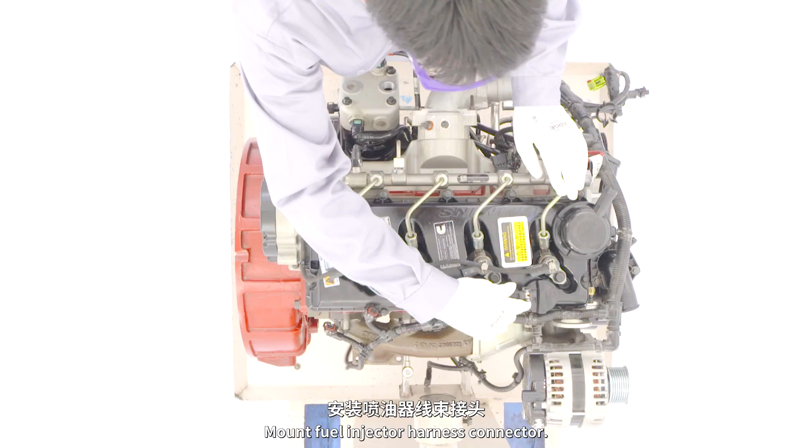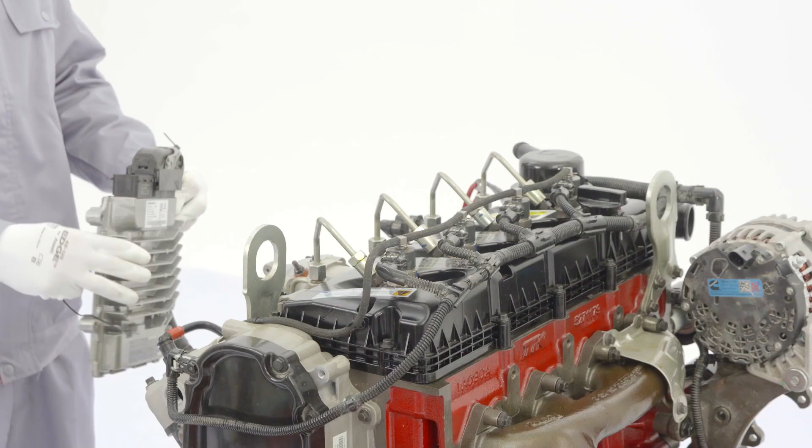Installation of harnesses. Mount engine harness. Mount fuel injector harness connector. Mount the camshaft position sensor harness connector. Mount oil pressure sensor connector. Mount intake manifold temperature and pressure sensor connector. Mount rail pressure sensor harness connector. Mount coolant temperature sensor harness connector. Mount crankshaft speed sensor harness connector. Mount engine control module. Note: ensure that no harness is interfered with other components. All harness connectors should be secure.

Inspection. After assembly, check if each system of engine is not installed or mounted incorrectly. Check if fuel system pipeline is connected reliably. Check if any harness connector is connected falsely. If the ECM is replaced, calibrated,